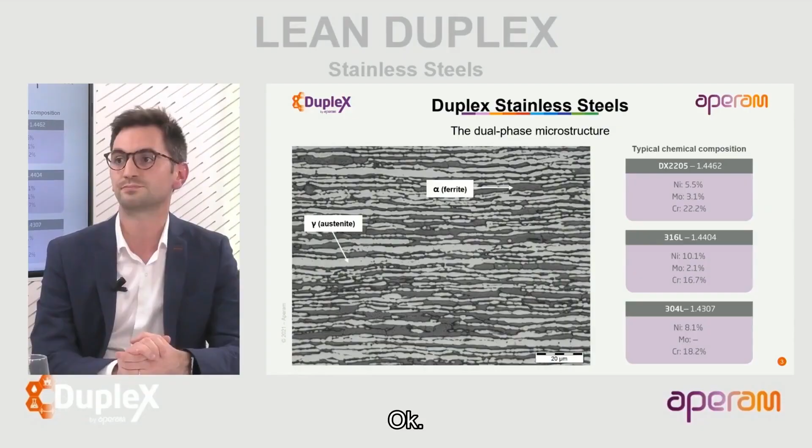Right, so the point of this webinar is to talk about not only duplexes, but lean duplexes. What exactly are those? So lean duplexes, by lean we mean even less nickel and less molybdenum than standard duplexes. So you can see here we have tried to position in terms of mechanical strength and corrosion resistance our lean duplexes DX2202 and DX2304 and compare them to the standard duplex DX2205, of course, but also some other grades.

You can see that for example, DX2202, you have only 2.5% of nickel, which is quite low, and almost no molybdenum. And what is very interesting is that the mechanical strength remains quite high because these are lean duplexes, but they still have this duplex microstructure, so about twice the mechanical strength of the austenitics.

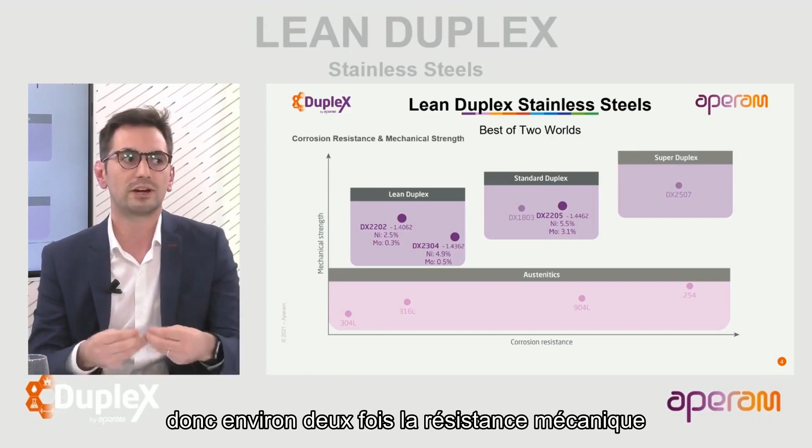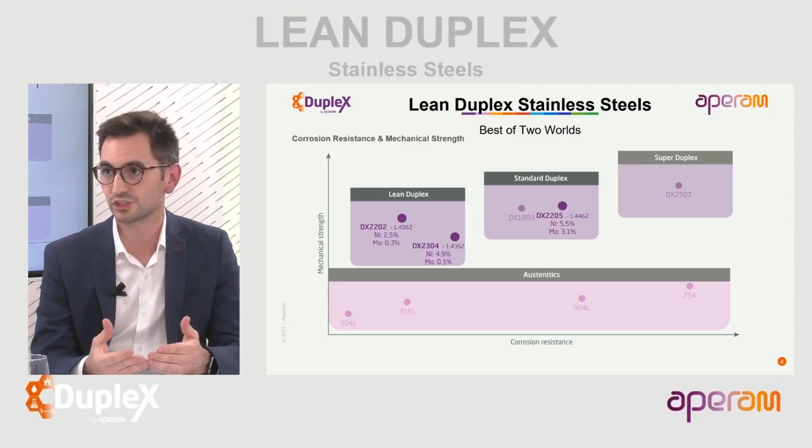And what's also interesting is that their corrosion resistance is, of course, not as high as that of standard duplex, but it is similar or even better than the traditional austenitic grade 316L. And because you have such good corrosion resistance with such low nickel, it allows for cost reductions, of course.

Now, you've mentioned cost reductions. Obviously, it's a very important point. From what you've been explaining, it seems to me that lean duplexes require quite a complex production process in general. Together with the high prices of raw materials, wouldn't this actually cancel out any savings gained from the reduced use of nickel and molybdenum?

This means also that these lean duplexes offer a more stable pricing to our customers, particularly the customers that are active in the construction project markets, which require some kind of price visibility and stability.

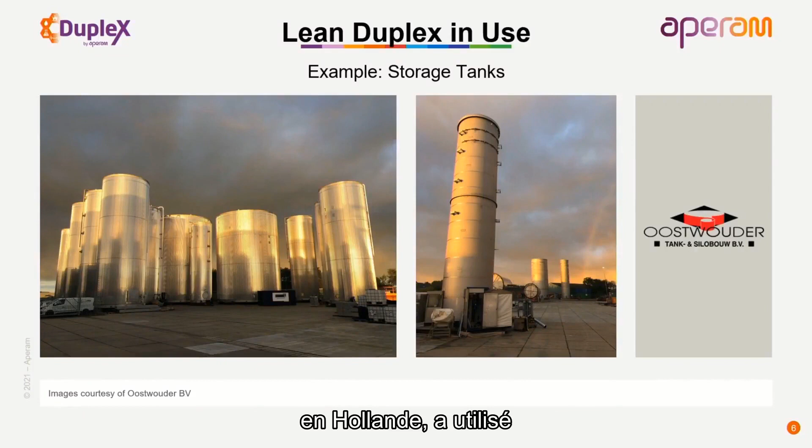And in order to illustrate this application, there is a picture of one of our customers using lean duplex for the manufacturing of storage tanks, and in a wide number of applications. This is a customer of ours called Oostwouder BV in Holland, who has used lean duplex for this kind of projects.

You see clearly that the lean duplex is about the same price as a 304L, and that it's 30% cheaper than a 316L, again expressed in euro per ton. And also, the properties of lean duplex are significantly higher than 316L.

So, as also explained by Charles, the combination of low cost on the one hand and high properties on the other makes lean duplexes a very attractive alternative for water-related projects, which have traditionally depended on classical austenitic stainless steels. Okay, well, Eric, as you just mentioned, water-related and biogas projects, which is, of course, the subject of today's webinar.

It's a good opportunity to discuss lean duplex's relevance. Can you, Charles, tell us and explain to us the link between lean duplexes and these particular applications? Of course. So water, wastewater, and biogas applications have in common the fact that they need equipment in different sizes, including very big tanks, silos. We have some examples here on this slide.

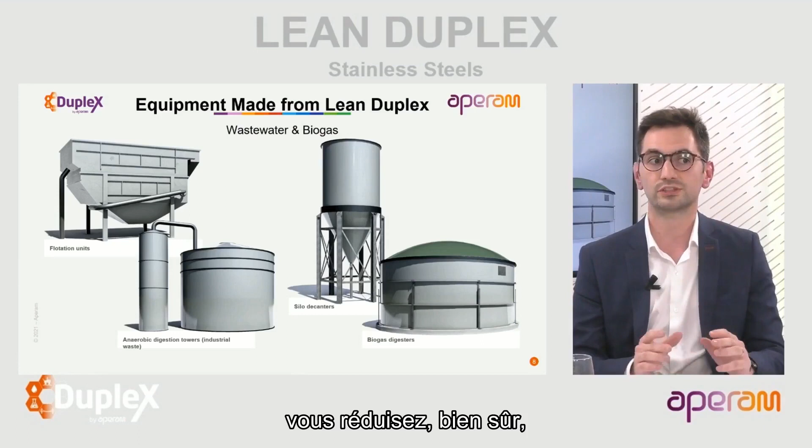So digesters, for example. And when you have such equipment in a project, it means very often that this equipment will represent quite a high percentage of the overall tonnage of stainless of the project. So when you can reduce the costs of the material that is used to produce such equipment, then of course you are able to reduce the overall cost of the project.

But in the end, what are the actual advantages, the key advantages of lean duplexes, such as, for example, DX2202? Yeah, DX2202. So I would say there are three main advantages. The first one, because we're talking about projects, is the price stability, just like Eric just mentioned. When you have such a project, you don't want the price to change between the moment when you build up the offer and the moment when you deliver the equipment to the customer.

The second aspect would be the corrosion resistance, because lean duplex have, let's say, a mid-range corrosion resistance, and that's exactly what this type of application needs. And the third aspect is the possibility of a thickness reduction, which means that because lean duplex are stronger, you are able to reduce the thickness of the sheets that you use to produce such equipment, and of course lower even more the costs.

Now, you've just mentioned corrosion resistance. Without getting too technical, so that even I can understand it, why is that so important? So corrosion is important because it can lead to the failure of the equipment. And when we're talking about water and wastewater related projects, you can have, for example, tanks. And if there is some corrosion, they could leak, for example. We have here on this picture an example of what is called pitting corrosion.

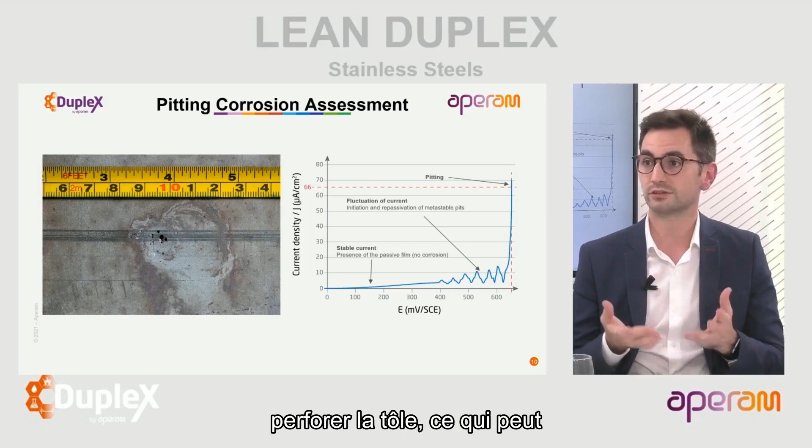So pitting corrosion is one of the most common types of corrosion, and it happens when you have chlorides, which means seawater, marine air, brine, and it is a very localized type of corrosion, which means that you will not have the propagation of the corrosion all over the surface of the material, but it will initiate on very specific and localized spots, and then it will propagate in the depth of the material. And when you have that, you can even perforate the sheet, and then it could lead to leakages, for example.

But fortunately, at Aperam R&D, our colleagues studied this type of corrosion quite a lot using electrochemical techniques, and so we try to understand very well the resistance to pitting corrosion of our grades. Well, how does that work? Can you explain it to me? How does that technique work to understand pitting corrosion? Yeah, I will try to make it simple.

So we see here on the right a graph, a curve actually that is the result of such electrochemical tests. And what we do is that we sweep the electrochemical potential and we check on the response, let's say, of the material in terms of electrical current. And we do that actually by putting a sample inside a water solution containing the chloride, so seawater.

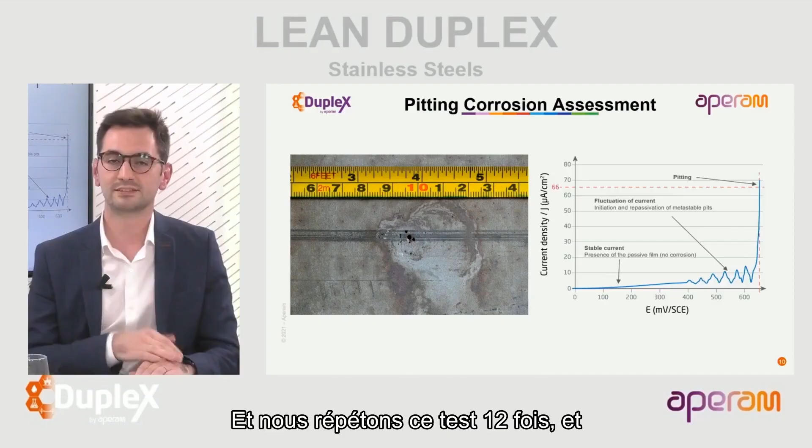And when you do such a potential sweep, actually at some point you will be able, just like we see on the graph, to detect a very sharp increase of the electrical current. And when you have that, it means that the pitting corrosion initiated. So the moment when this occurs, we note that value of the potential that we call E-pit for pitting potential, and we repeat this test 12 times. And then we keep the worst value, and that is what we call the E-pit minimum that will be used later on to rank the stainless steel grades.

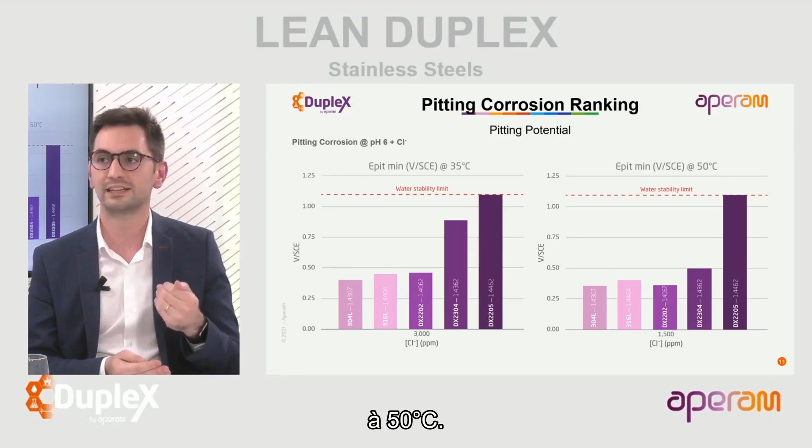But if we take a look at the lean duplexes, so the DX2202 and the DX2304, you will see that the 2304 is better than all the other grades, whatever the temperature, and that the DX2202 is at the same level of pitting resistance as the 316L at 35 degrees Celsius, whereas it is at the same level of pitting resistance as the 304L at 50 degrees Celsius. And that's very important information because it allows us to know the limits of the material.

It happens when you have a very tiny and confined space, for example, behind a screw head or a bolt, and when the brine is able to go inside that space, but since you're not able to renew the environment, it will lead to a very severe type of corrosion. So that's crevice corrosion. It can happen, and that's why we also study it. And by the way, there is a very recent study funded by the European Union that tried to understand this and also understand it using lean duplexes.

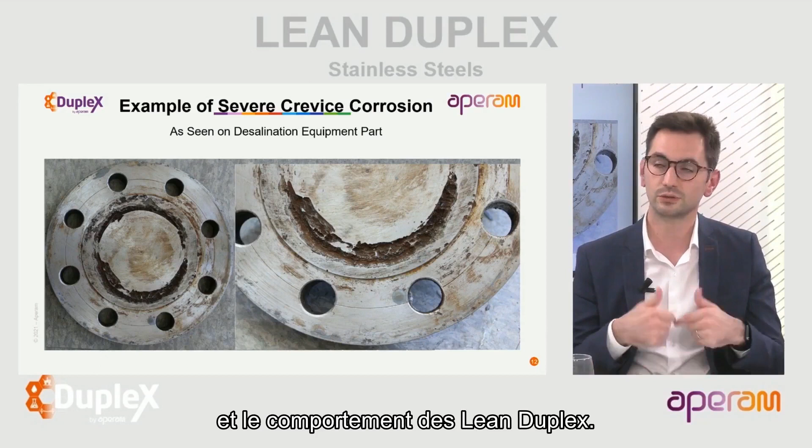That sounds fascinating. I'm learning so much about it. What else did this study tell you? Yeah, so this study was, as I mentioned, a study funded by the European Union. It was led by the French Corrosion Institute together with Veolia, which is one of the major players worldwide in terms of water treatment and water management. And it actually tried to assess different stainless steel grades in order to use them for the construction of wastewater plants. So I could mention one of the tests that were carried out.

We can see here it was the crevice corrosion test using the CREVCORR methodology, and without going too much into details, because this study is public, it was published in a scientific journal. We can see in this table here, when you have a condition indicated in green, it means that that steel passed the test. When you have a red cross, it means that it failed. And when you have green and red, it partially passed.

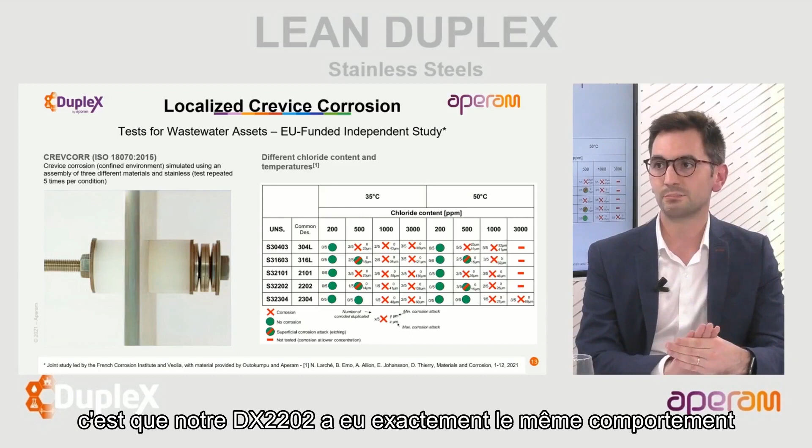But what is important here is that the 2304 was the best grade among the lean duplexes and austenitics. And also very interesting is that our DX2202 had exactly the same behavior as the 316L. And that's a very important result for us. Now, in terms of thickness reduction, it's obviously also a key advantage because it can bring additional cost reduction, I imagine. Can you tell us about that?

Of course, that's one of the main advantages actually of lean duplex as well. I was talking before about the mechanical properties of lean duplexes. We can see the yield strength, for example, which is a very important mechanical property of the material. For the lean duplexes, it will be between, let's say, 530 and 550 megapascal. You can compare that to the typical value for austenitics, which is more or less 300 megapascal. So we're talking about almost twice the yield strength, and that's the value that will be used in order to know if you can reduce the thickness of the sheets or not.

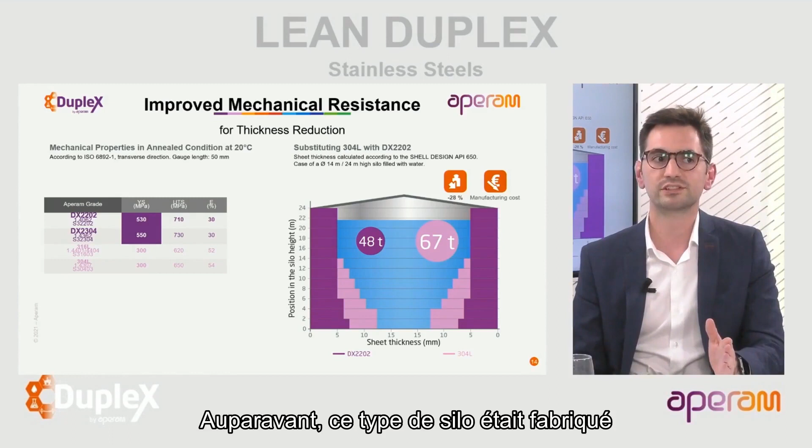And so it means we can, and we have the example here of a silo filled with water. You see the design here. Previously, this type of silo was made of 304L. It needed 67 tons of 304L, and now it is made of DX2202, and it needs only 48 tons, which means 28% less material. And then you can also imagine that you will have savings with other parts of the project, such as the transportation, for example, and also the manufacturing. You could also think about the welding, for example.

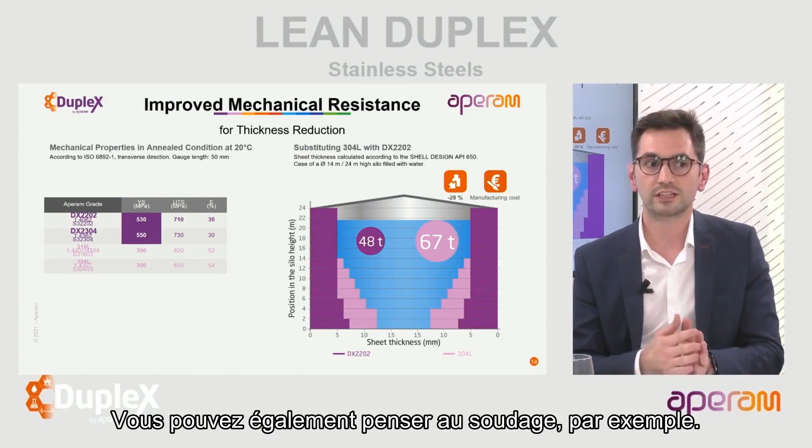Now, as you mentioned welding, I'm sure that will interest people who are watching us, since they might be wondering if the internal processes like equipment manufacturing would change if using duplex. Can you tell us a little bit more about the welding of lean duplexes compared to traditional grades?

Yes, of course. This is a very important point because, just like you mentioned, customers want to know how welding lean duplex compares to the austenitics. We must say that it is very easy. With lean duplexes, you can use any traditional welding process like TIG or laser welding. We have the examples here in this table.

And the only small adjustments that you have to make in order to weld lean duplex is that you have to choose the right filler metal for the welding. But the good news is that it's exactly the same filler metal that is used for a standard duplex, the DX2205, which is widely available. And then the other point is that you have to have a little bit of nitrogen in the composition of the welding gases. Why should you use nitrogen?

So I was talking before about the microstructure of the duplex. Actually, when you weld the lean duplex, you will have a little bit more ferrite than austenite being generated during the welding. And so when you add the nitrogen to the composition of the gas, you counterbalance that effect, and so the nitrogen allows you to keep the right austenite ratio in the microstructure.

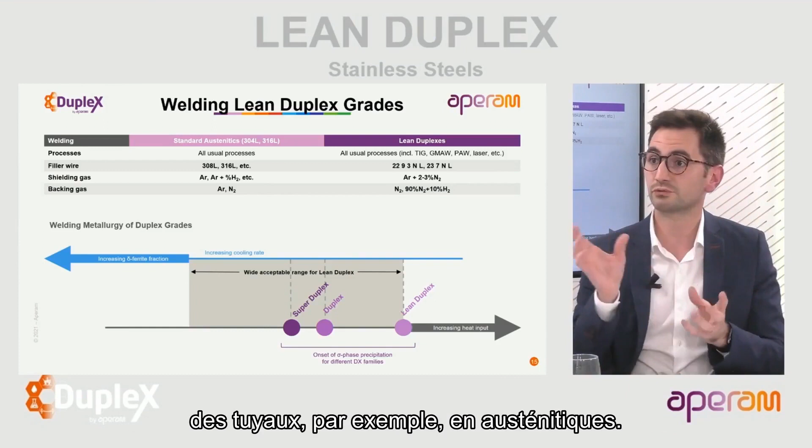Thank you very much indeed for those insights. I think we've all understood that much better now, thanks to Charles. What are the advantages of lean duplexes? But perhaps this is the opportunity for you, Eric, to tell us what are the advantages of working with Aperam.

Well, I would like to point out three things regarding these advantages of working with Aperam. First of all, Aperam is for the customer a supplier of choice, as we are offering a very complete and very high value product portfolio to the marketplace. Secondly, we have a global and highly integrated service and solution network, which provides proximity to the marketplace and also proximity to the customer, which is a key element in our strategy.

And third, we also have the ability to support innovative and high-performance solutions through industry-leading technical and R&D competencies, which gives added value for our customers. So these 3 points I would like to highlight as key points for Aperam in terms of positioning versus the marketplace.

And also, in terms of Aperam's recent announcement about becoming the first stainless steel company to be certified by ResponsibleSteel, it would be fair to say that Aperam offers a significant sustainability advantage. Exactly, Alex. So sustainability is at the heart of everything that we do at Aperam. We are not only responsibly producing solutions that are 100% recyclable, but we also have the best-in-class CO2 footprint.